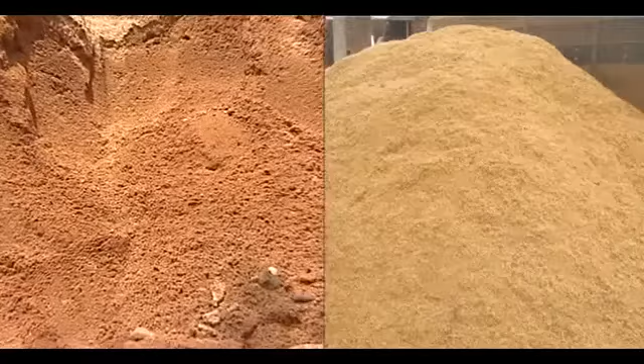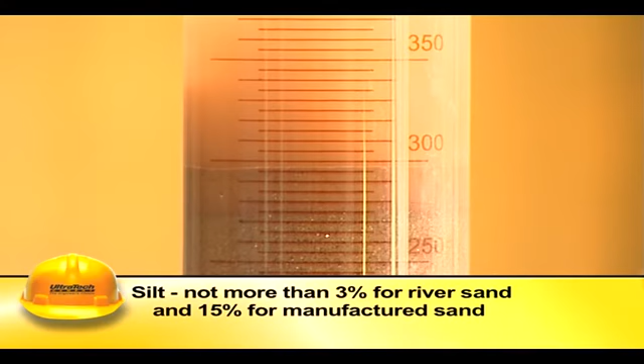Crushed gravel are different varieties of fine aggregates. Sand should be hard, clean and free from adherent coatings, organic matter, etc. Fine aggregates should not contain more than 5% of silt, clay lumps and chemical impurities. The silt content should not be more than 3% for river sand and 15% for manufactured sand.

These materials adversely affect the hardening, strength and also durability of concrete by initiation of corrosion of reinforcement. Any organic impurities like leaves, grass roots, decayed vegetation will interfere with setting and binding properties of concrete. Sea sand should not be used as it causes efflorescence, corrosion of reinforcement and retards setting, hardening of concrete.

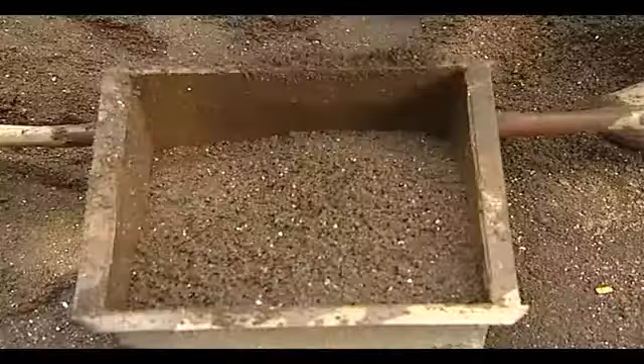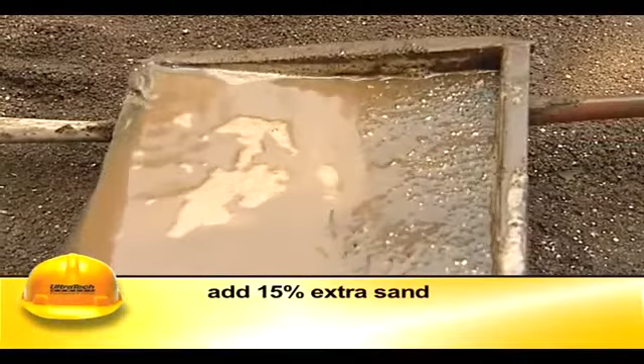Damp sand exhibits more volume. This is called bulking. When the damp sand is measured by volume, up to 15% extra sand is to be added to compensate for bulking. Sand should be so stacked that dust and other foreign matter are prevented from getting mixed with it.

Due to adverse impact on environment by rampant mining of natural sand, the government is encouraging the use of manufactured sand, which is satisfactory for making concrete. Manufactured sand is scientifically produced in specially designed crushers to ensure the compliance with national standards. Users should not be confused between manufactured sand and crusher dust. Crusher dust is the waste product from manufacturing of coarse aggregates which have very high

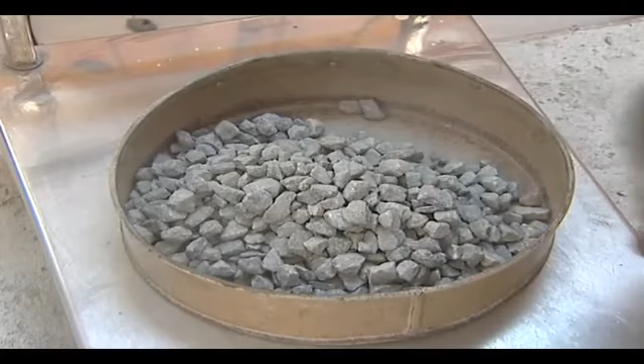...considered the best as they develop good bond with cement paste. They are gravel or broken stones and should be chemically inert, hard, strong, non-porous. Dirt coating and organic matter may impair the strength and durability of concrete and hence should not be present in excess quantity. Aggregates should not absorb water more than 10% of their weight after immersion in water for 24 hours. Those which absorb more water are porous aggregates and are not desirable to be used in making concrete.

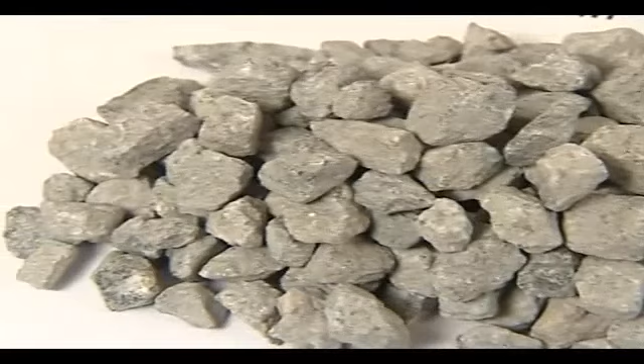Flaky and elongated aggregates should not be more than 35% by weight of the total quantity. For getting the best performance of concrete, angular and roughly cubical aggregates are ideal. The aggregates should contain different size fractions to ensure good packing of particles, thus reducing the voids and increasing the density of concrete. For most of the concrete works, 20 mm and down size of aggregates are used.

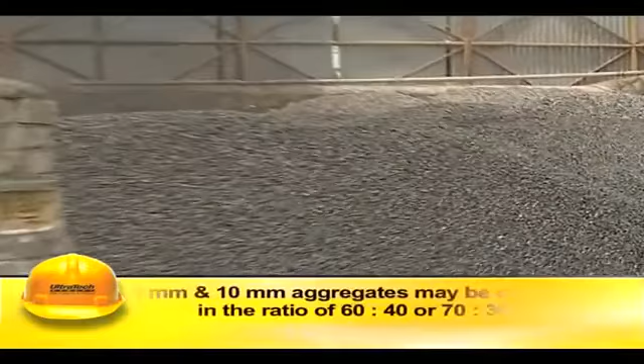To ensure that all the size fractions are present in the aggregates, 20 mm and 10 mm aggregates may be combined in the ratio of 60:40 or 70:30. Ideally, aggregates of...

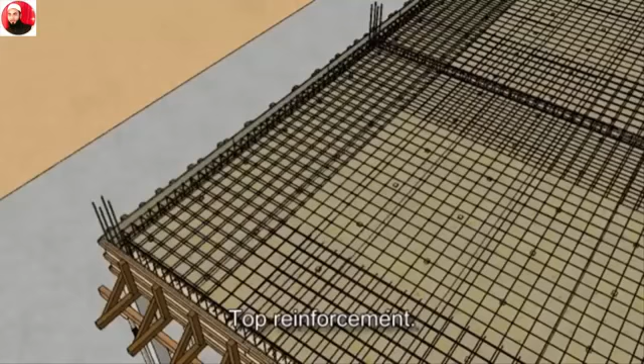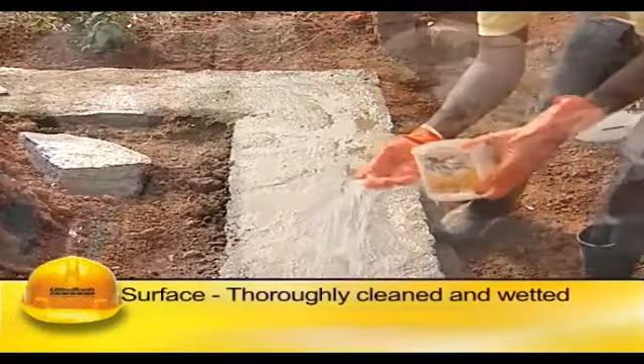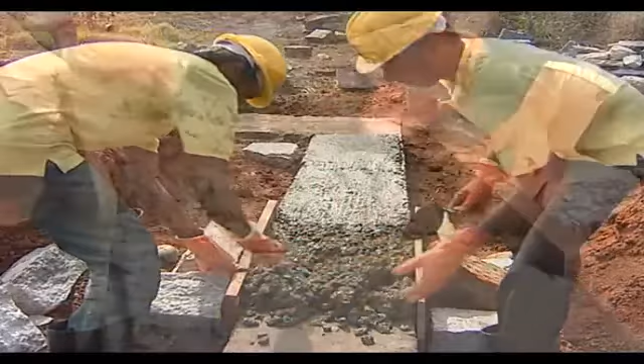...damp-proof course. The surface on which the damp-proof course is laid shall be thoroughly cleaned and wetted before starting the work. Cement concrete of 1:1.5:3 proportions along with suitable waterproofing compound in recommended dosage shall be mixed. The concrete has to be laid to a minimum thickness of 25 mm on the surface.

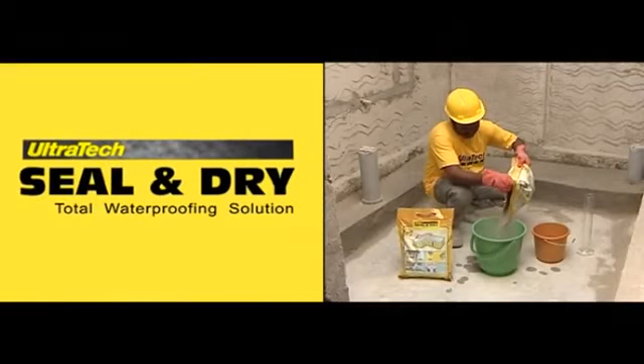After hardening of the concrete layer, a thin layer of Seal and Dry, which is a cement-based waterproofing compound from Ultratech or any other similar material, has to be applied in 2 coats perpendicular to each other with a gap of 4 hours between the coats. For application of Seal and Dry, you may refer to our video on waterproofing.

The damp-proof course shall be laid to the full width of the walls and the edges shall be straight, even and truly vertical. The DPC should be laid at such a height that it is above the normal level to which water splashes from the ground when it is raining. The level at which the DPC starts should be minimum 15 cm above the highest ground level.

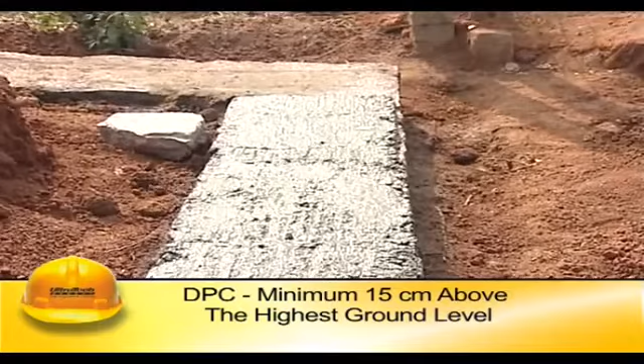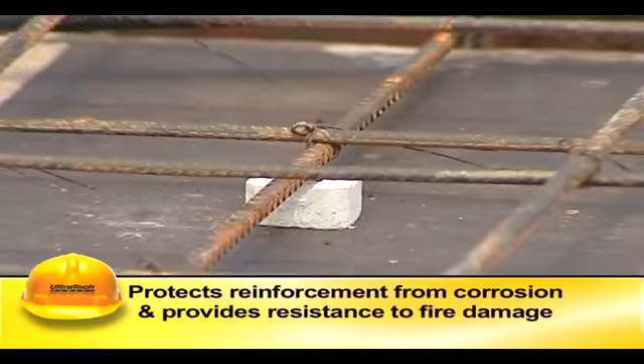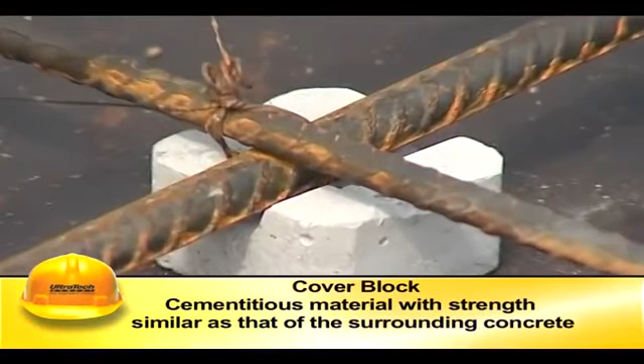The cover is the minimum clear distance from the reinforcement to the face of concrete. It is measured from the outer edge of stirrups or ties for beams and columns to the outer surface of concrete. It protects reinforcement from corrosion and provides resistance to fire damage. The cover enhances the durability of the structure. Cover distance is ensured by providing cover blocks between the reinforcement and shuttering before pouring concrete.

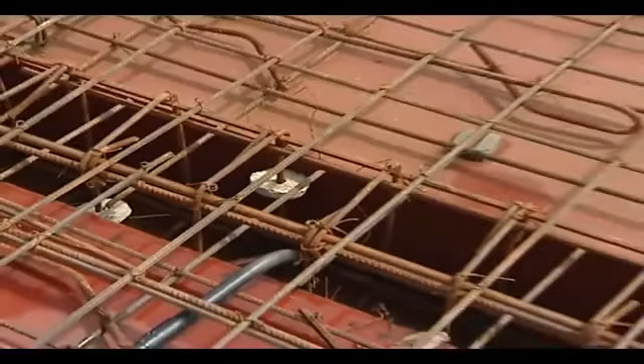The thickness of the cover varies depending on the type of exposure that the concrete has with surrounding environment. If the concrete is exposed to marine or aggressive surroundings, or if it is inside the soil having harmful chemicals, higher cover should be provided. More cover should be provided if concrete has to withstand accidental fire for longer duration. Cover thickness can range from 20 mm to 75 mm.

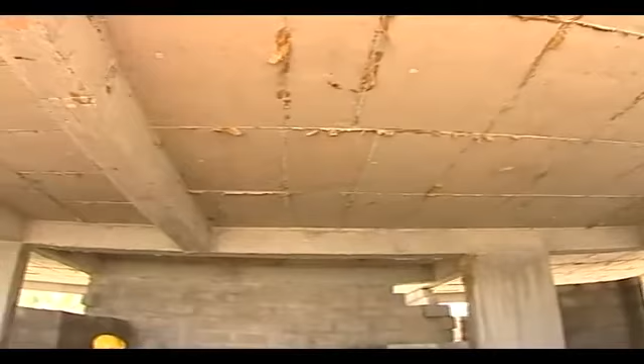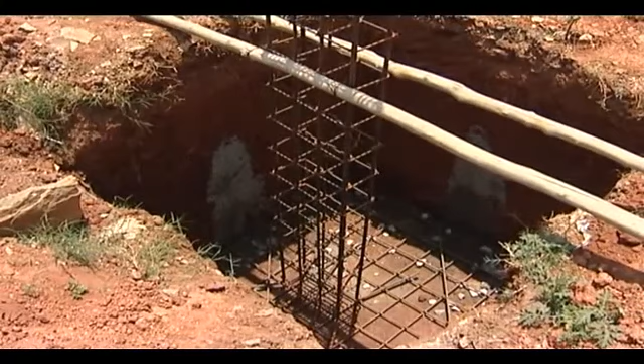The cover concrete should be dense and impervious. Stone chips, tile pieces, etc. should not be used in place of concrete or good quality PVC cover blocks. In slabs, the spacing of the cover blocks should be such that the reinforcement does not sag, ...with sufficient number of supports to withstand all the loads till the concrete hardens.

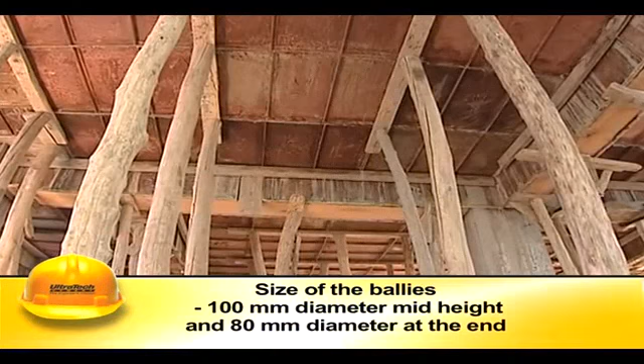Even though there are different varieties of formwork, the generally used formwork in house building segment is made of wood and steel. The wooden ballies or props supporting the formwork should be kept truly vertical. The ballies should be 100 mm diameter at the mid-height and 80 mm diameter at the end. They should have a spacing of not more than 1 meter center to center and should rest on firm base.

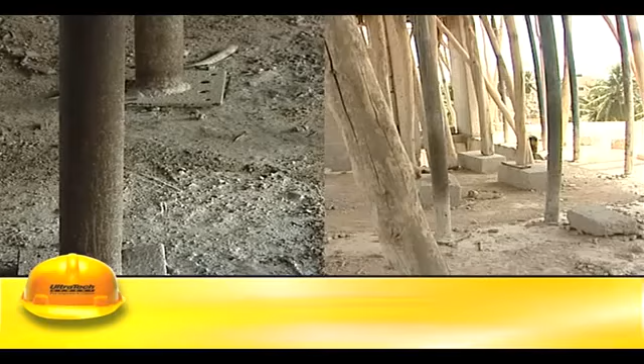The wooden planks or the mild steel sheets forming the centering are to be properly aligned to the required levels and dimensions. The gaps between the planks or sheets are to be sealed with mastic tape to prevent the leakage of slurry.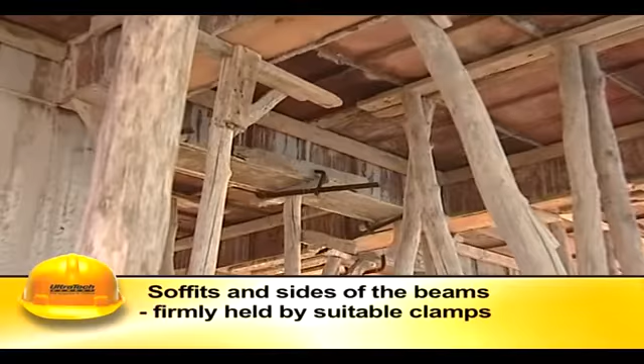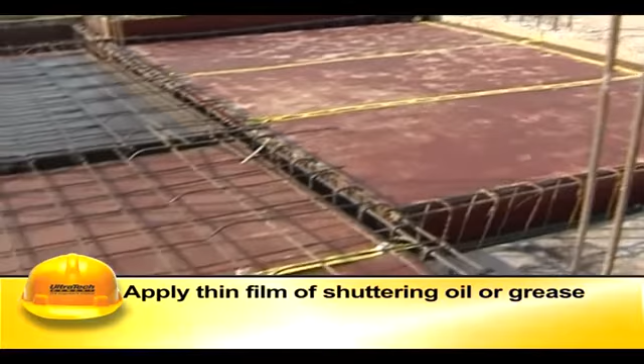The soffits and sides of the beams are to be firmly held by suitable clamps or any other arrangement. A thin film of shuttering oil or grease shall be applied on the surface of the formwork to ensure easy de-shuttering. Before placing the concrete, sawdust, wooden chippings, paper pieces, etc., if any, are to be removed from the formwork.

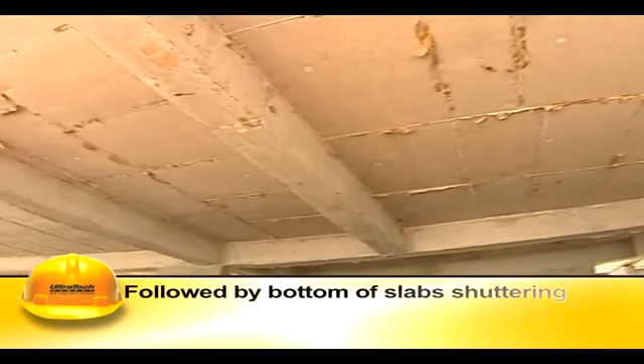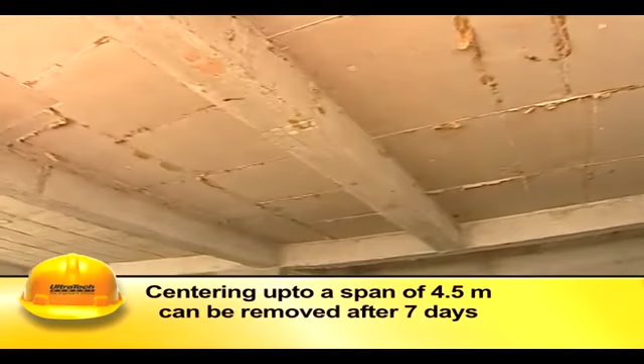The shuttering of the vertical faces of the beams should be removed first, followed by shuttering forming bottom of slabs. Lastly, the shuttering forming bottom of beams should be removed. The centering up to a span of 4.5 meters can be removed after 7 days and over 4.5 meters removed after 14 days, leaving the props below the beams.

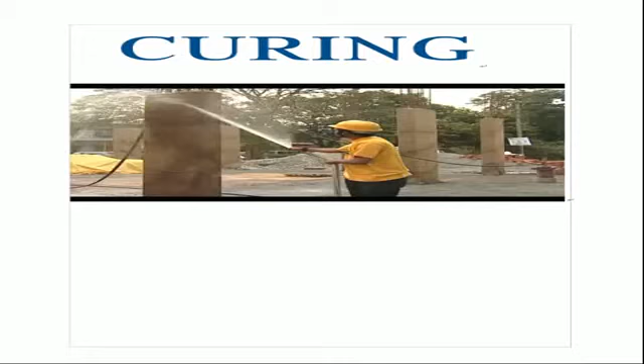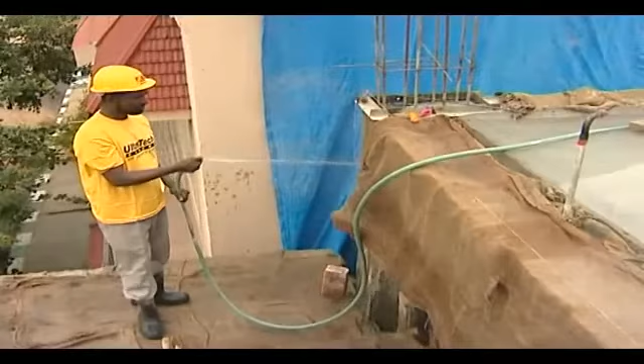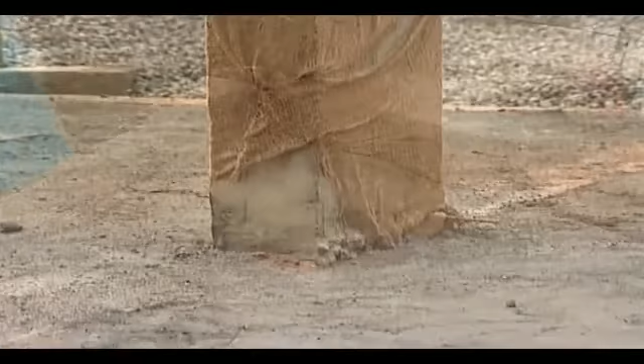...moisture of freshly placed concrete to ensure proper hardening, attaining desirable strength and durability. Curing keeps the concrete surface moist and reduces the shrinkage cracks. Curing should be started at the earliest. It has to be started when surface is hard enough for a person to walk over it without damage to concrete. Till such time, the surface moisture may be maintained by splashing or spraying water without force.

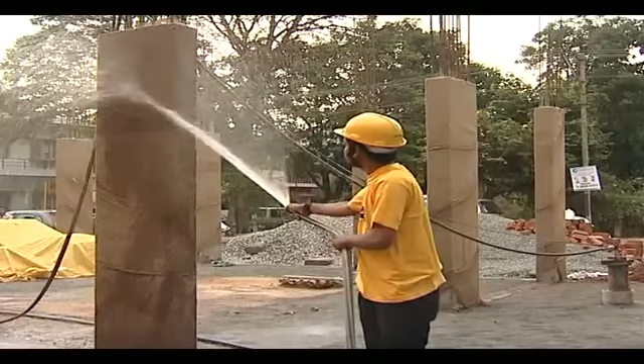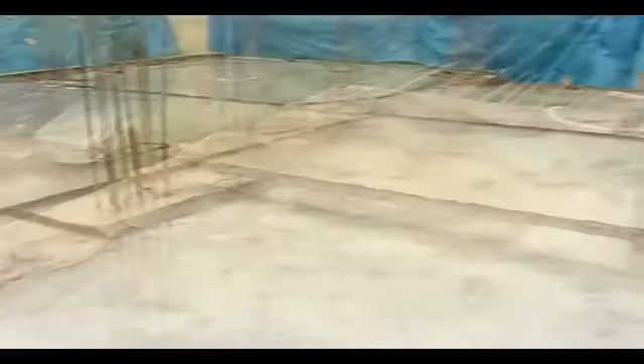Method of curing depends on type of member. Ponding is used for flat members like slabs. It is done by impounding the water to a depth of around 50 millimeters. The slab is to be divided by constructing small bunds with lean mortar or mud. Bunds are filled with water. Ponds are replenished with water at frequent intervals.

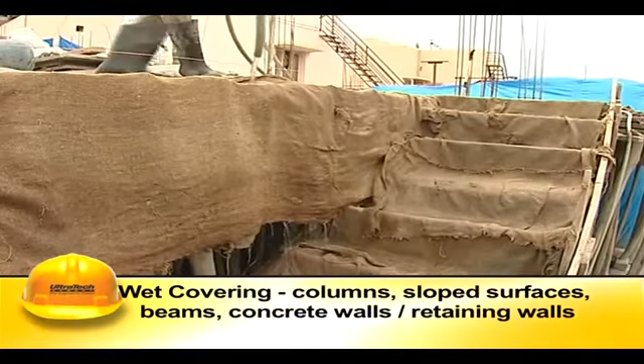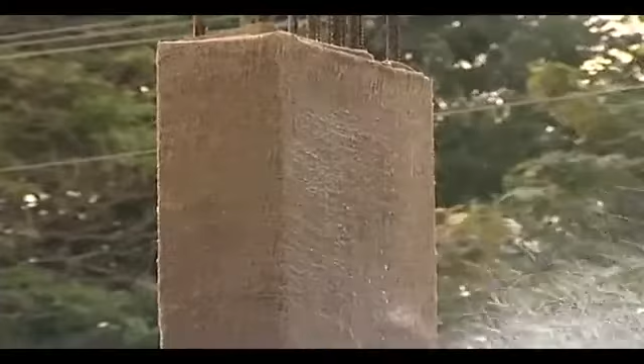Wet covering is generally used for columns, sloped surfaces, beams, concrete walls. The concrete surfaces are to be covered with wet jute bags, burlaps, straw, etc. Water is sprinkled on these coverings at regular intervals to ensure continuous wetness. These should not be allowed to dry even for a short duration.

Sprinkling or spraying method is generally used for masonry and plaster. The frequency of spraying or sprinkling should ensure that the surfaces are continuously moist. It is advisable to cure the members for a minimum period of 10 days. Intermittent curing is more dangerous than not curing, as it leads to...

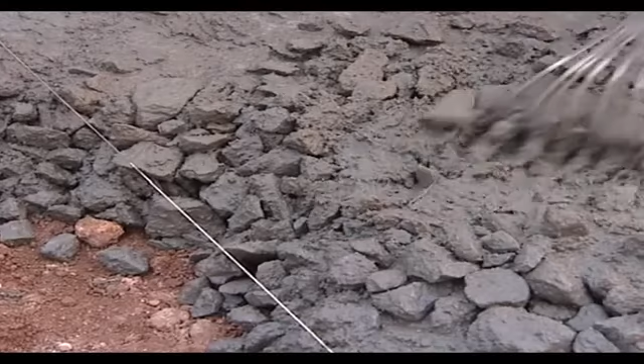The method of laying the flooring using vitrified tiles and granite is shown. Flooring shall be laid on base concrete of 1:4:8, which is provided with adequate slope. In the absence of base concrete, the earth shall be properly sloped, watered, rammed and consolidated. The base concrete or the RCC slab shall be cleaned, wetted and mopped before commencement of the flooring.

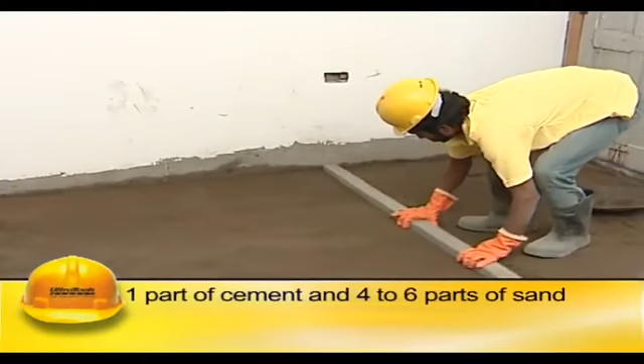A bed of cement mortar having 1 part of cement and 4 to 6 parts of sand is to be laid to an average thickness of 20 mm and minimum thickness of 10 mm for vitrified tiles. The minimum cement mortar bed thickness shall be 12 mm for granite flooring. The mortar shall be spread, tamped and levelled. It should be allowed to harden sufficiently to offer a stiff base for the tile to be set in place.

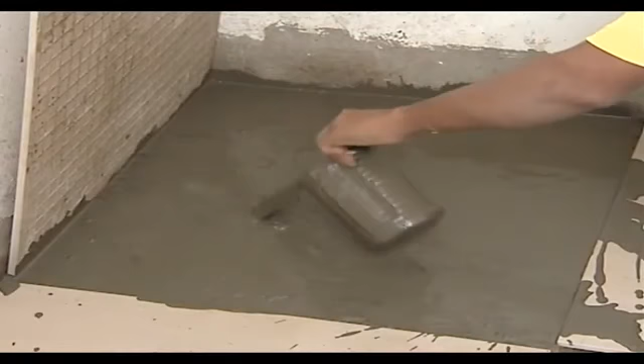Cement slurry of honey-like consistency shall be spread on the bed at the rate of 3.3 kg of cement per square meter, on which the tiles shall be fixed one after the other. The tiles shall be gently tapped with wooden mallet till it is properly set and in level with the adjoining tiles. The joint shall be kept as thin as possible. The spacers may be used to have uniform joints.

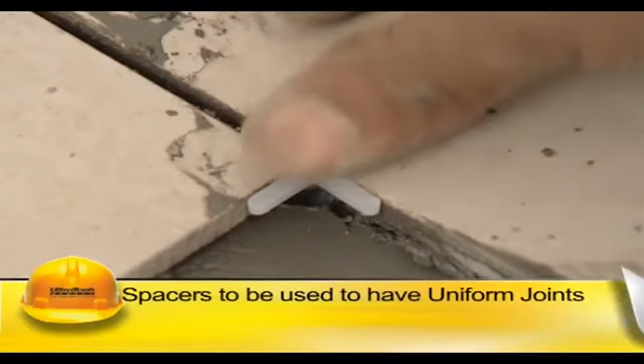The joint shall be cleaned of the grey cement slurry to a depth of 2 to 3 millimeters and all dust and loose mortar shall be removed. It shall be flush pointed with white cement mixed with color pigment to match the color of tile.

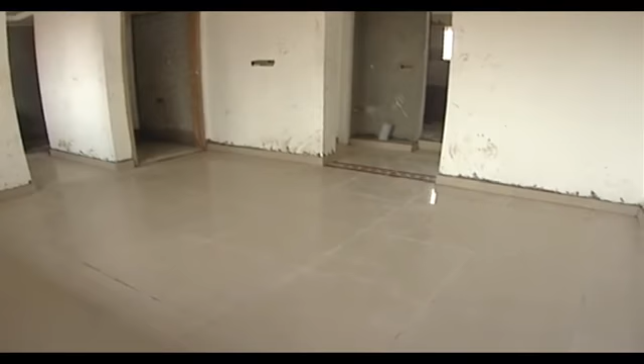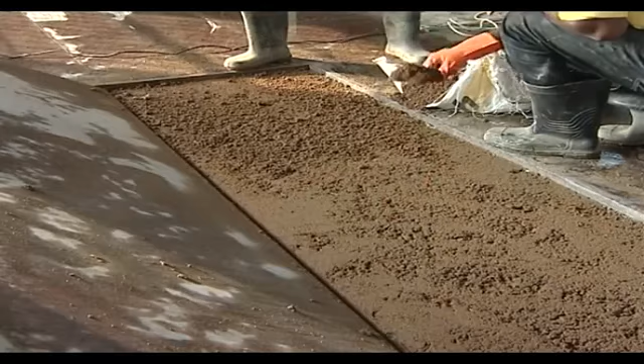For laying of the granite slabs, cut the slab to the required size and shape. The bedding mortar shall be spread over the base concrete under each individual slab. The granite slab is then laid over it, gently pressed with wooden mallet and levelled. The granite slab is then lifted up and fresh mortar is added to the hollows of the bedding mortar. The mortar is allowed to harden slightly and cement slurry of honey-like consistency at the rate of 4.4 kg of cement per square meter shall be spread over the mortar.

The edges of the slab laid in place are smeared with cement paste and then the next slab to be laid is placed in position. It is gently pushed and tapped with wooden mallet till it is properly bedded and level with the adjoining slabs with as fine joints as possible. The cement paste that might ooze out through the joint shall be cleaned off.